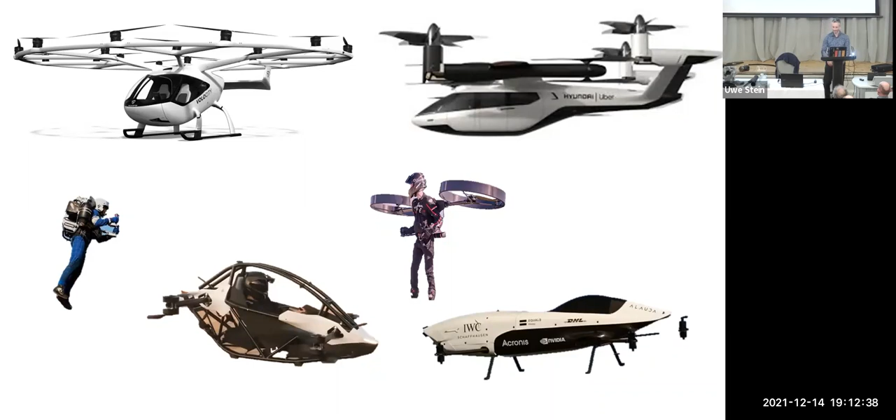I'm going to come back to this later in the talk, but first, let's try to answer the question, are we just a couple of years away from having air mobility from drones? Is this the next revolution after the smartphone? Or is it one of these fuel cell or fusion reactor technologies that's always 10 years out? And in 10 years, we're still looking at the new technology that's just about to come. So we're going to look at this first. Then we're going to move on to the Flowcopter work on the drone. And at the end, I want to talk a little bit about the markets we're trying to address with this.

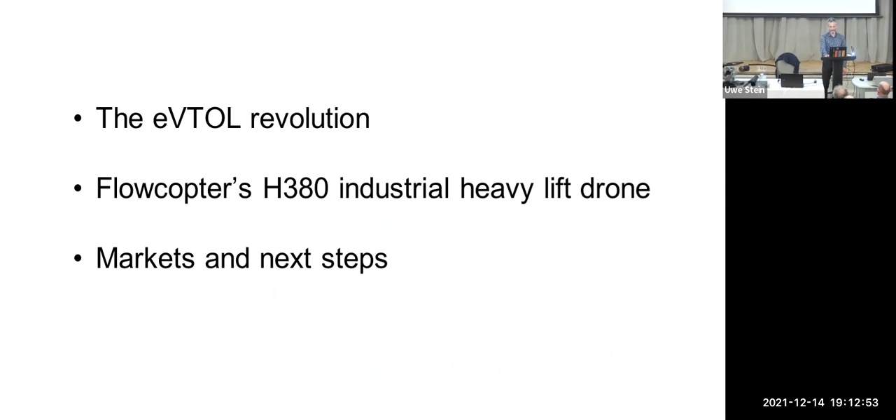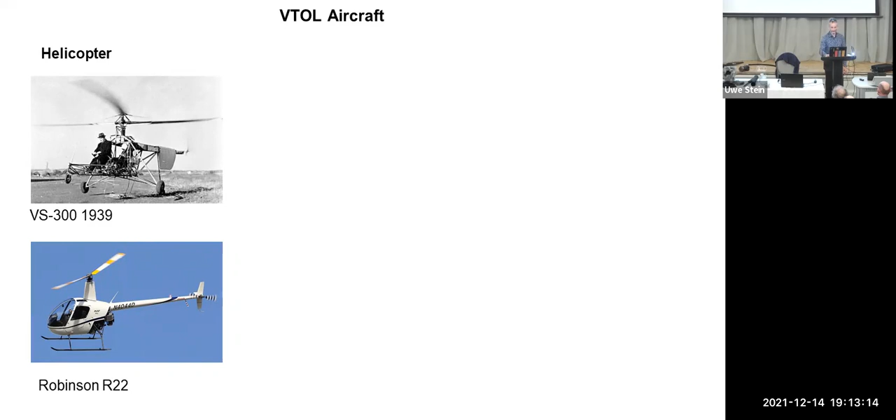Most of you will think when it comes to vertical takeoff and landing aircraft about helicopters, as they've been around for about a century. You can see a very old one and a modern one on the left. What might be slightly more surprising to you is that actually before helicopters, people were building quadcopter drones. As you can see there in 1923, so 10, 15 years ahead of the first commercially viable helicopter. And at the time, it might have seemed easier to have 4 props lifting you up, controlling the pitch on each of the 4 rotors.

But it turned out to be a very, very difficult task for the pilot to stabilize such a device. So you had a joystick controlling the pitch on the 4 different corners, and the vehicle is inherently very unstable. And pilots just could not stabilize the device in air. The helicopter, as you can see on the left, is inherently easier to stabilize because you have a single large rotor above you with a large gyro effect. So that's really what stopped development of these quadcopter or drone type looking devices.

And it's only since the advances in computer technology and gyros, where part of the control of the device will be done by a computer, that they came back into play about 10, 20 years ago, maybe slightly earlier. So first, very simple electronic control systems. And they have now been developed, as you can see in the lower picture there, to quite advanced and easy to fly devices. Effectively, they're flown by a computer.

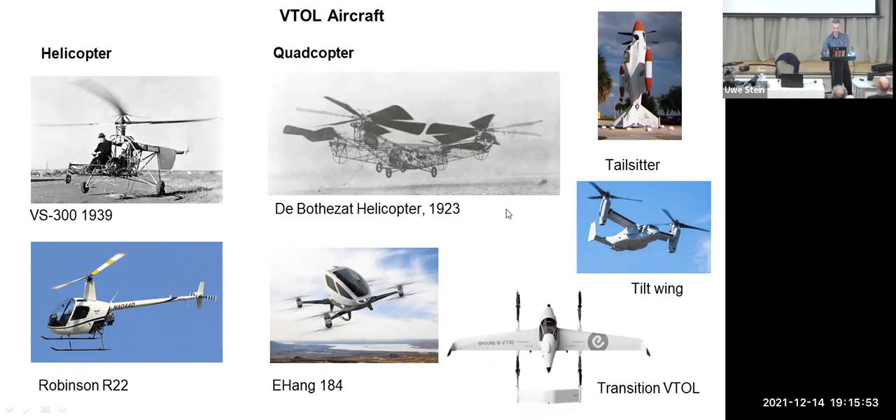Of course, to fly, we need a power source. Otherwise, you couldn't stay in the air. And really, the two competing technologies are gasoline or fuel, or batteries. And traditionally, pretty much everything in the air used gasoline to stay up in the air. But nearly all the new proposed devices for urban transport in cities claim that they can use batteries. And I did a quick comparison here to see what is the challenge.

So if I want to design a drone using batteries, then we have to limit ourselves to the capabilities of these batteries. So when we look on the left, we know that there's about 12 kilowatt hours per kilogram of petrol. So burning 1 kilogram of petrol gives you 12 kilowatt hours. You run it through your engine, maybe 30% efficiency, maybe more or less depending on the type of engine. And you end up with about 3.6 kilowatt of useful shaft power per kilogram of fuel. Let's compare this to the batteries.

There are some experimental batteries with incredibly high power densities, maybe above 400 watt per kilogram. But in reality, when you put them into a battery pack as a product, you're well down on this. So to give you an idea, the latest Tesla battery pack, probably using one of the most advanced mass-produced batteries, is at about 160 watt hours per kilogram.

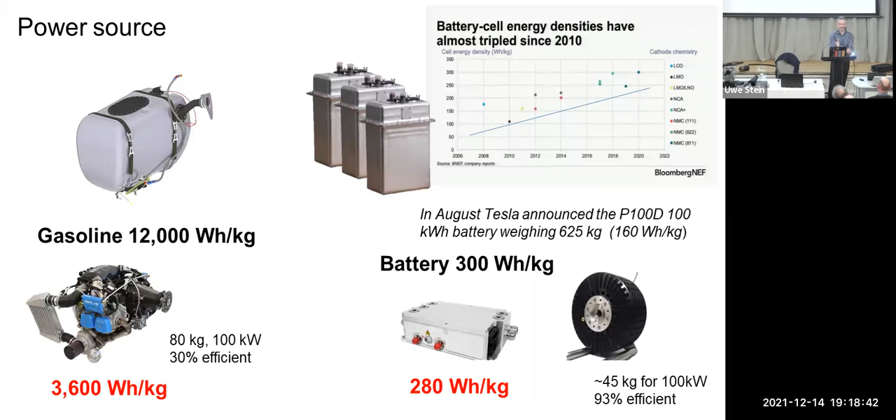So what we can see here is that the battery solution is down by a factor of about 13. So for 1 liter of fuel that I have in my helicopter, my drone needs about 13 kilograms of battery pack. And this might be a problem because, you know, when you want to fly, it can't be too heavy.

Let's look, how much energy does it take actually to fly? So we want to stay in the air. We need an engine to lift us up. How much energy does it take? And there's a very simple correlation between your rotor size and the energy it takes to stay up in the air with a rotorcraft, with a device that flies below a propeller. So basically, the bigger you make the rotor, the less power you need.

And that's just because the axial velocity of the fluid against which you push yourself up follows sort of a square law. Velocity squared is the energy in it. So the faster you accelerate it down, the more energy you need, squared. So on the right graph here, you can get an idea what the industry is doing. You can see that if we are on a large helicopter rotor, we can get as much as 5 kilograms lift out of 1 kilowatt of power.

But if we are on the bottom right there, let's say we have the Harrier jump jet and it's jetting the gas down at about Mach 1 out of its nozzles, then we need about 5 or 10 times the energy to stay airborne. And that brings us to the next problem because, as I said, let's design a drone. Let's see if this actually works.

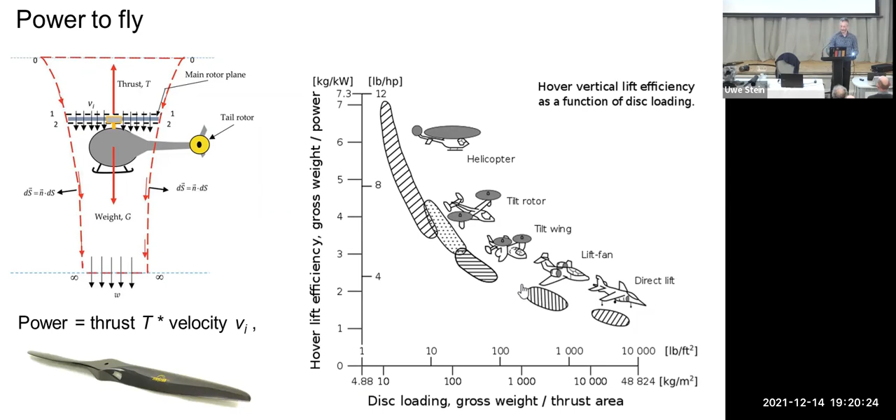You want an urban transport drone, it's meant to park out there in the street. So the size of a car would be a sensible starting point, but that gives you quite a small rotor area. So let's have a look at the extremes.

So on the left, we see the Atlas project. It's a project to build a helicopter that's powered by a human. Very limited power. And obviously they only achieved this after years and years of development by going with a massive rotor. You can see the picture up there. The rotor is spanning the footprint of a 737 passenger jet. And you see in the picture below the person hanging in the lines of this rotorcraft.

And it's quite amazing. They managed to produce 155 kilograms of lift out of 1 kilowatt available power from the human. Right, 6.5 watt per kilogram. Not very practical for our urban transport delivery device.

If we go to the other extreme, a Japanese startup company using a motorbike engine, 170 kilowatts, screaming along. When you watch the video, it's incredibly noisy. And here we have a device that weighs 350 kilograms. It needs most of its engine power to take off, so maybe 150 kilowatts. So you get the idea. If you want an urban transport device, you can make it big, and it needs very little power, but you make it very small, and it needs an awful lot of power.

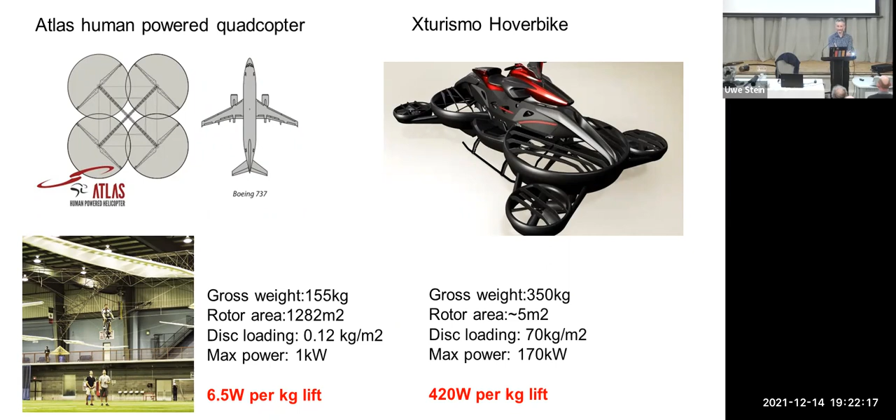Another interesting fact to consider when you design a rotorcraft is, so far I only talked about how much energy it takes to lift it off the ground. Of course, we don't want to just stay in the air, we want to travel along. And there's an interesting effect. Once you start flying forward, you actually need less energy. Because when you sit still, you create your own downdraft. So the whole air column in the area you are in starts moving downwards. You have to push yourself faster and faster up against this downdraft that you're creating.

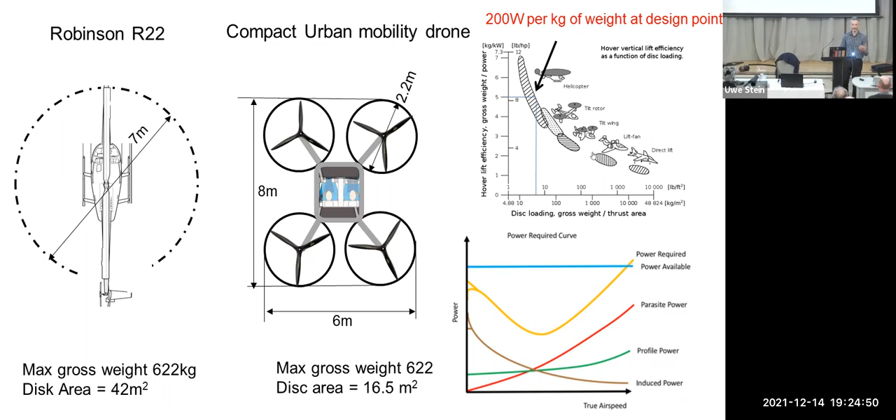So, you want to go home? Maybe it's two of you want to go home. Maybe it's one with a pilot. So the verdict is out if anyone is brave enough to go into a device without a pilot. There's just a fun question on a Christmas night: if you could order your Uber Air or Uber self-driving car or Uber taxi with a driver, what would you pick? There wasn't a clear answer. I guess people would be intrigued by sitting in a device and being flown home. But then being in there without a pilot is also quite a scary experience.

Remember, these things can't auto-rotate. People talk about emergency parachutes, but they just don't work if you're low. They only work when you're high up, because you need some time for the parachute to come out. And also, who would deploy the parachute? Is it the passenger on their own, just pressing a button and saying, I think it sounds bad, I deploy the parachute, or do you have someone sitting far afield, maybe in another country, making this decision for you? So there's quite a lot of problems with autonomous flight, because today we trust the pilot to make decisions when things start going wrong. So, a bit unclear.

But let's imagine we have two people, a passenger and a pilot. So 180 kilograms for two people. Let's imagine we want to cruise along at 100 kilometers per hour, sensible speed. And then we need to look at the range. Helicopters today, 300 kilometers, 400 kilometers would be a typical range for small helicopters. Not a hope with batteries, but what's a number that would make sense, where you could say we could do something with this device? So flying from London City to Heathrow Airport, then having to recharge, sort of a minimum number where you could say there's some use for it as an urban mobility vehicle. I mean, people don't like to buy electric cars with less than 200-mile range, but let's say this thing has only 30-mile range.

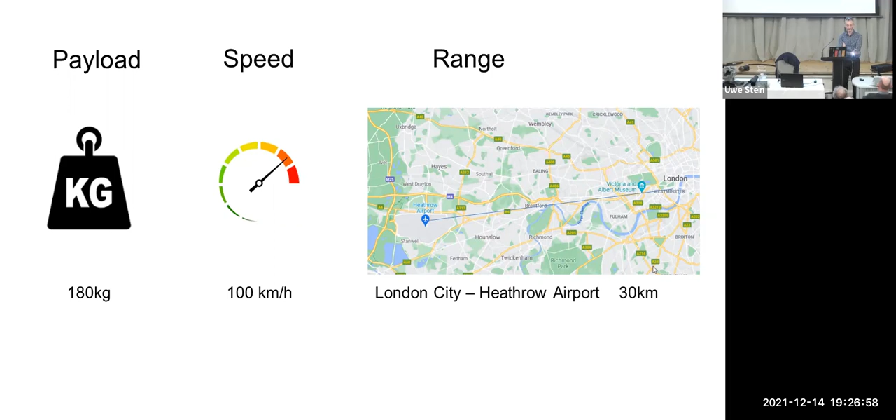Okay, so summarize the numbers. We want to fly 30 kilometers at 100 kilometers per hour. It takes about 20 minutes if you allow a minute for takeoff and landing. You, of course, have to consider when you're up in the air that there's wind. And even a moderate headwind of 20 miles an hour, which is not very much, it's an average day in Edinburgh, means you already need to have the energy for 30 minutes. And then you still got to consider that things could go wrong. Let's say you've flown in the wrong direction, or your landing pad has gone on fire.

So there's a pretty hard rule today that helicopters must have 30 minutes reserve fuel on board in order to be allowed to fly in the UK. So you need to have 30 minutes spare fuel capacity when you land. If you go below it, you have to actually report it as an incident. You landed with less than 30 minutes to spare, it has to be recorded. So let's say the lobbying is strong and we get this down to 15. Still, in my mind, a bit like driving along a busy motorway with an exit every 20 miles and having 20 minutes of fuel in your tank. It's quite scary, but let's say we get this down to 15 minutes before you drop out of the air. That means we've got to design a 45-minute flight time battery into this device.

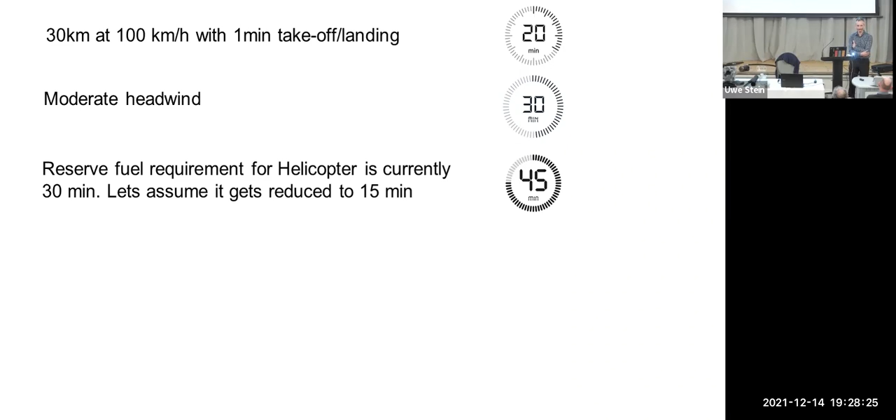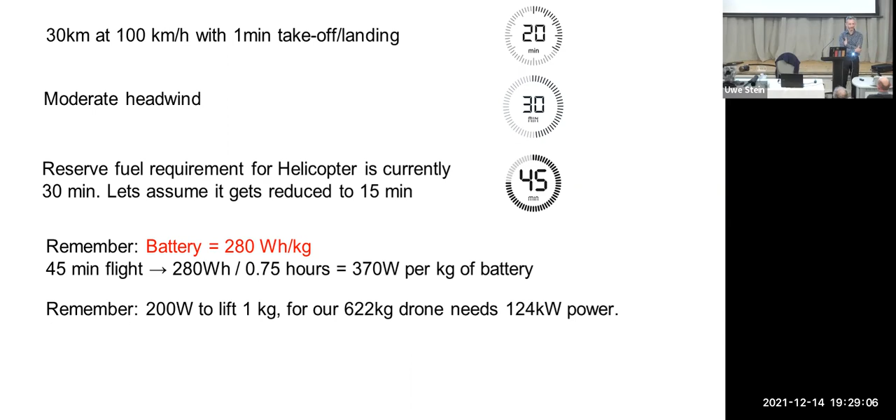So you might remember I said it's about 280 watts per kilogram you get from your battery. That's after the efficiency from the conversion. So for a 45-minute flight, I can get 370 watts from my battery, since I want to discharge it in 45 minutes. So I can draw a bit more for the 45 minutes than the capacity per hour. And I need to produce 200 watts of lift for 1 kilogram. So I need 124 kilowatts of power on my device to stay airborne. And now we can just calculate out the battery weight is about 332 kilograms.

So I started with designing a drone, which I thought would be the small hover bike you can jump on. Went already up to 600 kilograms. It's quite a big beast, but that's a long way from where we need to be. It still doesn't work because it's only leaving me 110 kilograms for everything else. And I don't know how heavy this drone will be, but even the most modern carbon fiber structures and lightweight electric motors are a factor of 2 or 3 out. NASA recently did a study looking at these drones, and ended up with a 2-ton drone having a 700 kilogram battery in it to cover 30 minutes of flight.

So I must disappoint you. I would say the revolution of calling Uber Air to fly you home is still some way from where we are today. But you might make up your own mind.

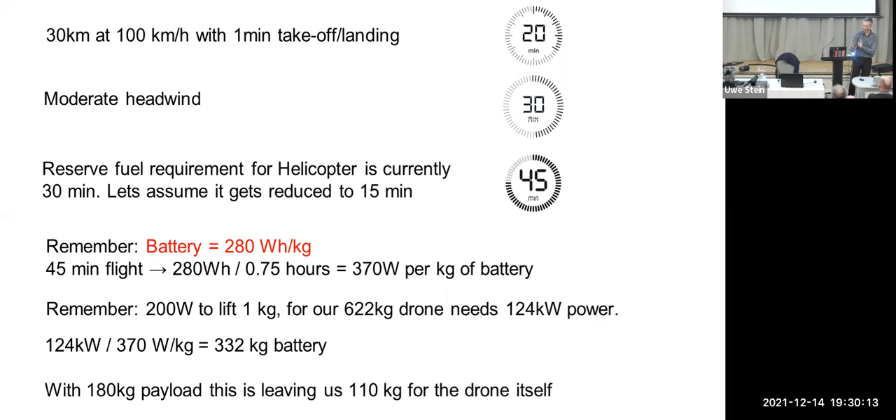And we can see these numbers with one of the leading companies developing it. On the left, you see EHang, Chinese developer. So they got to 30 minutes. That's basically with no reserve. It's probably with 20 degrees and a high pressure region, and the trickle charge batteries and everything at the best. That's how far they got. But as we know as engineers, there's a difference between an academic study and a one-off demonstration and actually having a product in the market. Because batteries do age, they're not all the same, you need to leave some margin.

And Volocopter, a German company, I think they're doing a little bit better because when you look at their device, they decided to put a massive rotor above it. So they got it down to something like only 12 kilograms per square meter loading. So they have a 40 square meter rotor. But it's not clear to me how to transport this device because it's a fixed carbon fiber ring up there, something like 8-meter diameter. So it's not exactly an urban mobility device, I would say. It's probably quite a difficult device to transport.

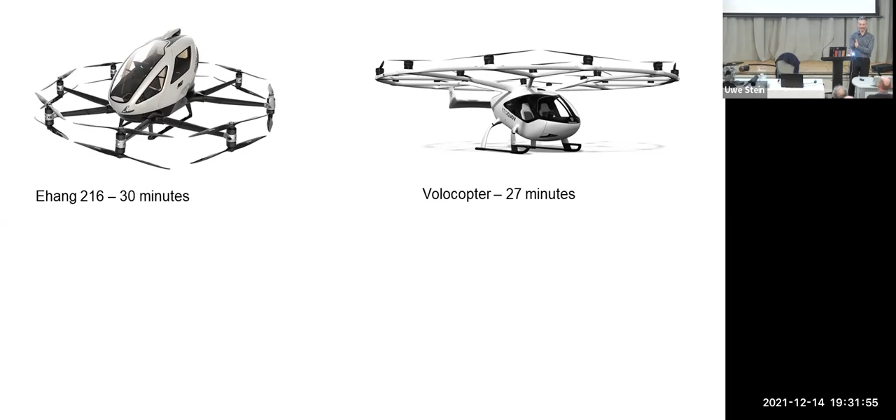But of course, these companies are well aware of their shortcomings. And 2 things happened fairly recently. A, these billions of investment that went into them are starting to be questioned. And all the companies, and I really mean all these companies, are now moving on. Airbus, Volocopter, EHang, there's 2, 3 others I found. They're all going like, okay, this is not going to work. Let's make transitional planes. Because it's just inherently so much more efficient to fly with a large wing and only use the props for takeoff and landing.

So we can see a change in the market from the dream of a little hover bike to now these companies working on what's effectively full-size aeroplanes with props to take off and land. And even then, the battery is only giving them ranges of 100 miles, 150 miles, not really competing with today's expectations on aerospace.

So it's not all doom and gloom. I mean, you might ask yourself why the guy who works in a drone company turns up to tell you how hopeless everything is. Because you might also remember back 10 minutes ago, I told you that fuel is about 15 times more energy dense. So if you use fuel, it actually works quite well. But then there's, of course, a dirty word, using fuel, CO2, very bad for the environment, using a petrol engine.

But you also got to be very realistic about an electric plane or drone, because we all know when you make planes heavier, they need a lot more energy. And flying a battery with you also costs a lot of energy. So when you look at the actual CO2 footprint, you find that these electric drones are pretty terrible. And we can demonstrate this by having a look here.

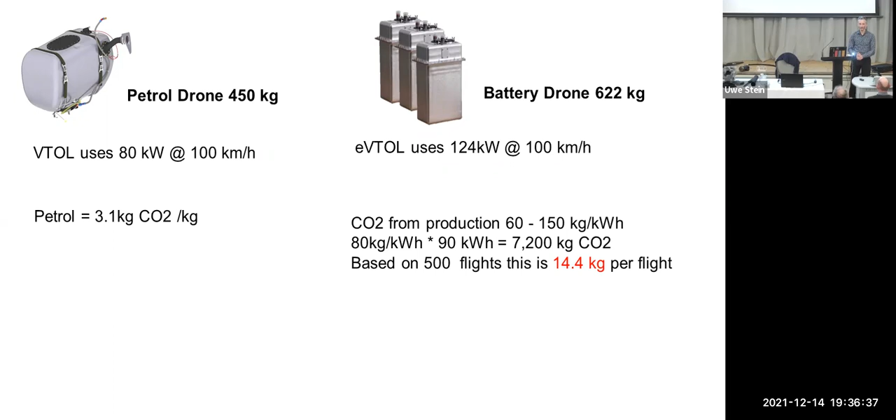And even with 500 fast charge and discharge cycles, you would expect quite a significant decay in your battery performance. So some people say these are fast discharge rates. NASA had a recent study; they can only get about 200 cycles where they can guarantee the performance of the battery. Other manufacturers claim 800, so I used 500 here. So it means for each flight, we have to allocate 14.4 kilograms of CO2 emission from the battery production alone.

So again, we can calculate this out. Flying with my drone, an 80 kilowatt drone, for 20 minutes needs about 7.2 kilograms of fuel and emits 22.3 kilograms of CO2. Do the same calculations on the electric drones. I've got to charge the battery.

The National Grid is about 230 grams of CO2 per kilowatt-hour. Some grids like in Dubai are 5 times this. Some grids in Norway may be lower, but global is more like 300-400. So I'm quite optimistic here with a fairly efficient grid, the UK grid, where you don't have much coal and lots of renewables. Still then, we end up emitting actually more CO2 with an electric drone.

Maybe the solution is to cycle and not fly with an electric drone. Whatever we do, flying is probably quite carbon heavy to get from A to B. In fact, a Bell helicopter only needs 16 liters per 100 kilometers. So that's even better than a drone. So whatever we do here, it's going to be quite difficult to compete against the bog standard Robinson R22 or Bell helicopter. When you take the numbers from them, they're even better. Some of them are as low as 10 liters per 100 kilometers of flight.

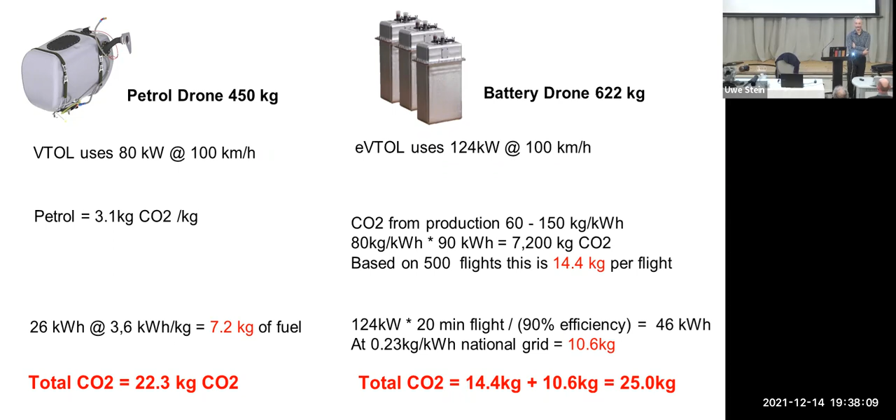So not so easy. But one thing we can do, and there might be some future in this, and I think the aerospace industry is increasingly looking in this direction, is to use excess energy from renewable production to produce hydrogen. Because we have more and more renewable energy coming on, and there are times on a Sunday afternoon when you just have too much. In North Germany, often half the wind farms get switched off because they don't know where to go with this electricity. So one option is to use this to make hydrogen.

And once you have hydrogen, pretty nasty stuff, difficult to transport, you can combine it with CO2 from the atmosphere to make synthetic fuels. That's a technology which is quite expensive at the moment. It's very inefficient. But I think there are more voices in the aerospace industry saying that might be one way forward. This might actually be a more sensible way forward than flying heavy batteries around. So to source your fuel from renewable energy.

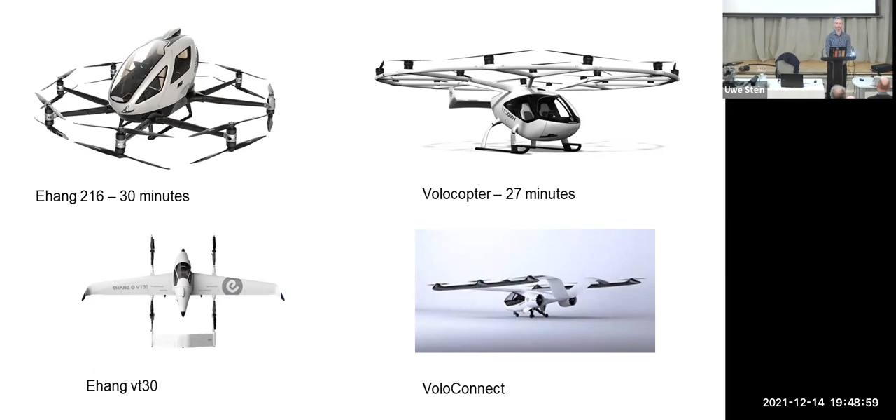We also looked at diesel piston engines for planes, because if you want to fly out to, let's say, a wind farm, they don't like having petrol out there, so they would prefer to use diesel jet fuel. So the next engine, the Continental, is the equivalent engine. It's a bit heavier for the power, but then you need less fuel per hour. So on a longish flight, it works out pretty equivalent.

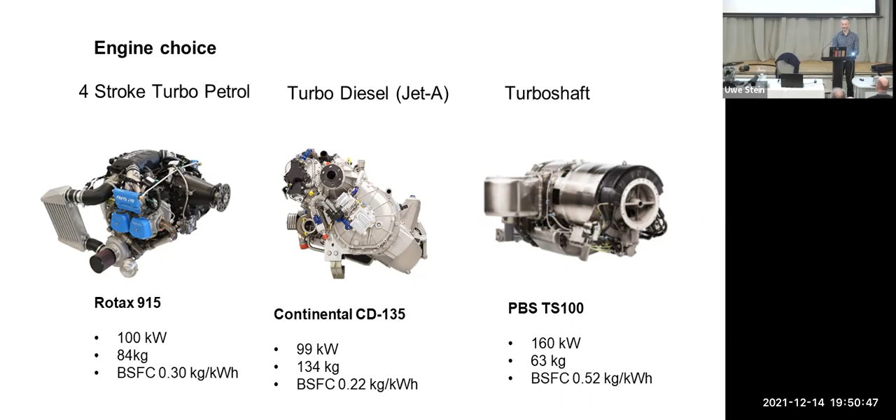Using this engine, as you can see on the left, we combine it with what we call a digital displacement pump. It's a new type of hydraulic pump that's very efficient, very controllable, and can have multiple outputs that are independently controllable. I brought you some samples, this 3D printed one, to get an idea of the size. In cast iron, it's about 45 kilograms. You could probably make a lightweight aerospace version, about 25, 30 kilograms. And this pump can convert the full 100 kilowatts from the engine into fluid power.

And it can independently control 4 outlets. Conversion efficiency is around 94, 95%. Much more power dense than an electric machine, and also a lot cheaper. It doesn't need an inverter controller for it. And in production, you're only looking at a few £1,000 for a machine like this, compared to very expensive electric machinery.

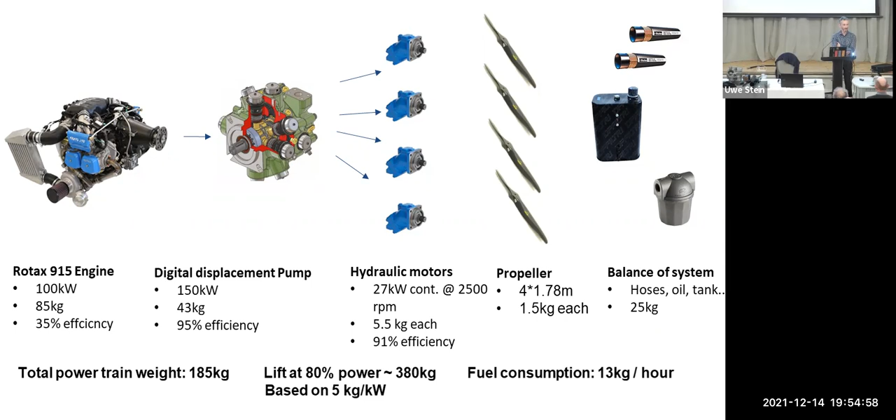Fuel consumption is about 13 kilograms per hour. So again, when you work it out in CO2, it's not terrible for a 400 kilogram device flying. Could probably be a bit better. If you use a diesel engine, it comes down to about 10 kilograms per hour, but that's roughly where we are.

So picking up again from where we were in Artemis, when we developed this technology, we were bought over by Mitsubishi Heavy Industries. We started developing a large wind turbine, got all the way up to a 7 megawatt transmission. And Artemis is a quite inspirational place. And people had lots of ideas making pumps for America's Cup boats and for all sorts of wacky applications. And Niall Caldwell came up with the idea to put it in a drone. He said people were smiling initially a little bit, but then doing some numbers, it turned out that it's actually quite an attractive arrangement. Next question that people had, is it actually controllable? Can you actually control a drone with such a transmission?

And to answer this, we built a small test rig. So what you see is a surfboard mast. On the mast, you see a small hydraulic motor, smaller version of this one, and a small propeller of about this size, half the size or the area of the full-scale one. And we said, let's see if we can fly. Because if we can fly this weight on an arm in a position, then obviously we should be able to fly a drone, which is just having 4 corners.

And you can see in the video that we can control it on the lower set point. We can then do a control demand and put it into the upper set point. But we also need to be resilient against somebody upsetting the system. So we had a special technique to trigger some gusts, which you will see appearing now. Somebody came with a broom and hit it. But you can see the control system is always bringing it back to the target position.

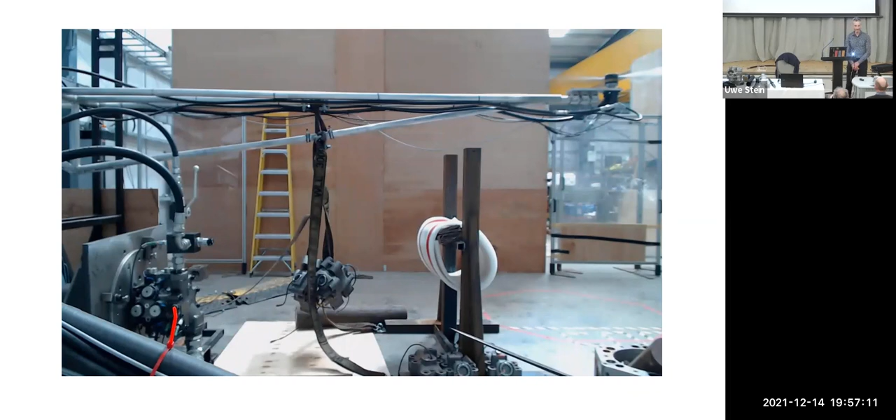So here you see the next arm. It's now a bit more beefy. It's a large aluminum substructure. And on the luggage belts there, you see some cast things. We loaded it up with about 85 kilograms of lift weight on the outer end.

And now we're going to the full scale. So the motor I showed you a moment ago is a larger propeller. And we said, can we lift 85 kilograms and stabilize it? And again, it pretty much worked out of the box. We got it to fly. So it's sort of nicely stabilizing it with the heavy load.

Again, one comment on urban air mobility. We had this one running in what we call building 3, which is a long way from the office at the front, I don't know, 100 meters. And the people in the office were complaining about the noise.

These props are noisy. Once you have a tip speed of 150, 200 meters per second, the aerodynamic noise is like this booming noise. It travels. It's a bit like sitting in the airport when one of these flyby prop planes takes off. You hear this booming. So it doesn't matter if you're electric or an engine. Most of the noise really comes from these propellers.

Having a sort of confidence that we can make it work, we can control it, we can scale it, the rate is good, we decided to go forward with this project. But Danfoss had bought us at this point, and being a hydraulic company, delivering pumps and motors to large OEMs such as Volvo and Liebherr, it didn't really fit their portfolio. But getting together with a couple of colleagues, we said it's just too good an opportunity to pass.

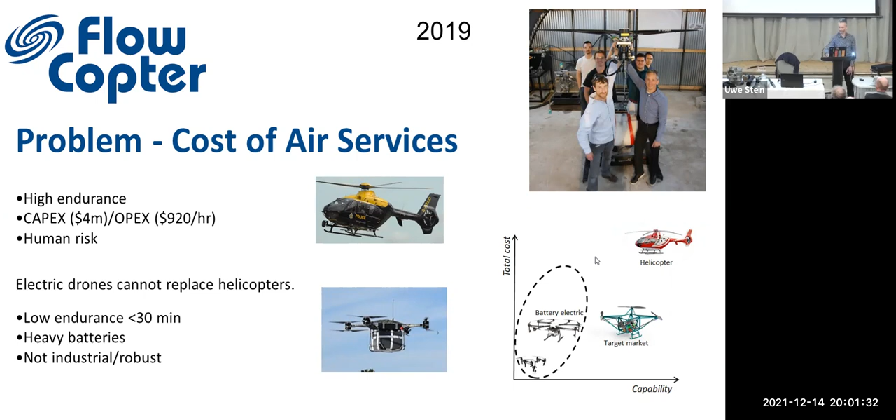We then looked at what business model we choose for the company. And of course, we can just write a patent and try to license it, or we can just try to make drones. And we decided to keep, initially at least, the assembly of the drone, the testing, control system development, and the core IP in-house. So we can mature it in the company, we can make the inventions in this field, we can patent them, we can grow the company at the technology readiness level up to maybe 5, 6, make demonstrators.

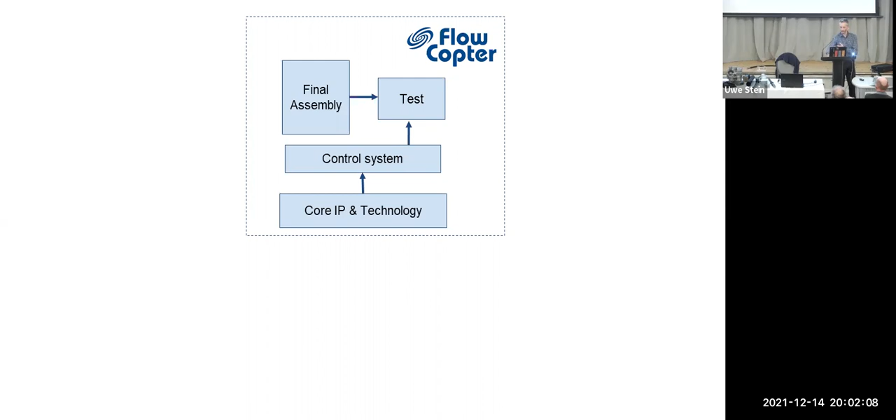And to do this, we have to rely on strong partners, suppliers. We're working very closely with Rotax on the engine. We're working with Danfoss on the hydraulics. We are in touch with a number of flight control system developers, all the way from hobby-grade Pixhawks to very expensive commercial aerospace rated flight controllers. And so we are working a lot with suppliers, and we like to focus on what we're good at, which is a transmission. So we like to focus our team on developing the transmission, and then hopefully use partners and suppliers to do the subsystems.

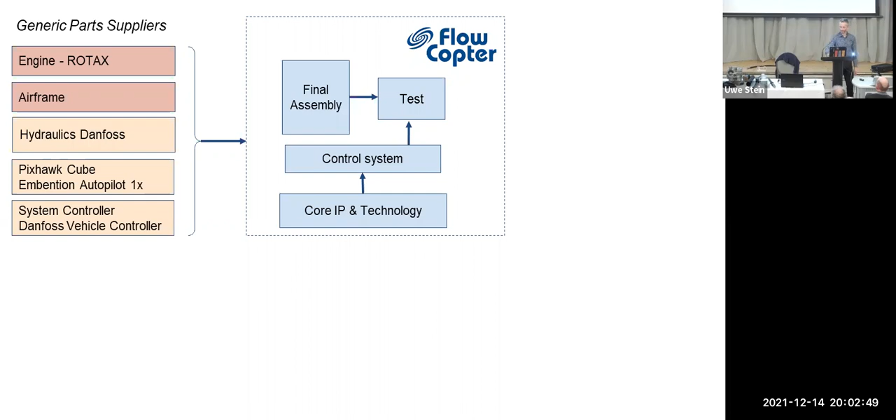Initially, we're looking at markets that are relatively easy to get into. I'll say some more words about this later. But in the long run, of course, there's different exit strategies from the company. We could either be bought over by a large company such as Airbus or license them. Who knows, if it works, they might take interest in us. We could work with a smaller player who wants to make machines for Coast Guard service. So we are quite open on this, but for the next couple of years, we want to mature the technology inside the company.

And for this, of course, we need money. So we're looking at the moment at a combination of government funding, some small amount of money from the Scottish government. We raised some money between us and friends and family. We raised some money from a VC in America. And also we are now engaging with one customer who is planning to give us some money to make a demonstrator. So we're trying to have multiple income streams, both soft and hard money in this one.

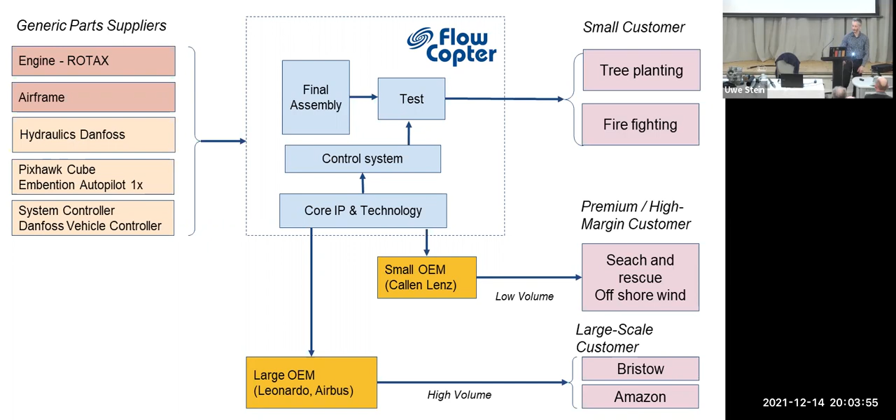Next step, once we had the transmission demonstrated on a single arm, is to make a device. So we decided not to invest a lot of time into carbon fiber structures, keep it simple. We just welded up the device. So we just bought aluminum tube, welded it up, not with a view to fly it, with a view to assemble a complete system and operate it on load cells.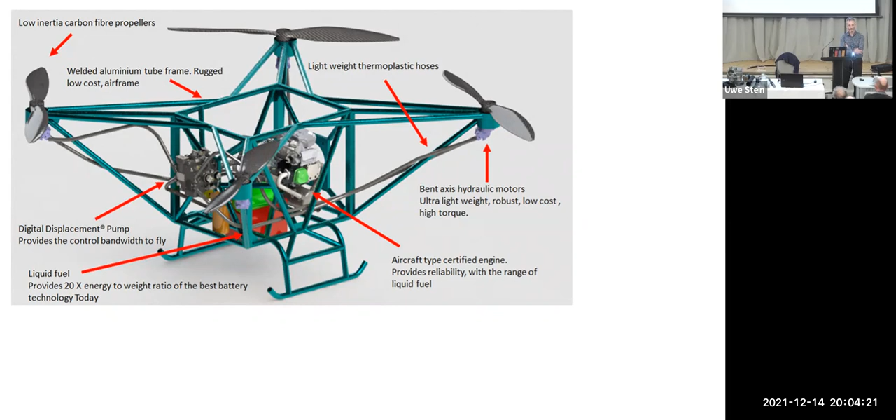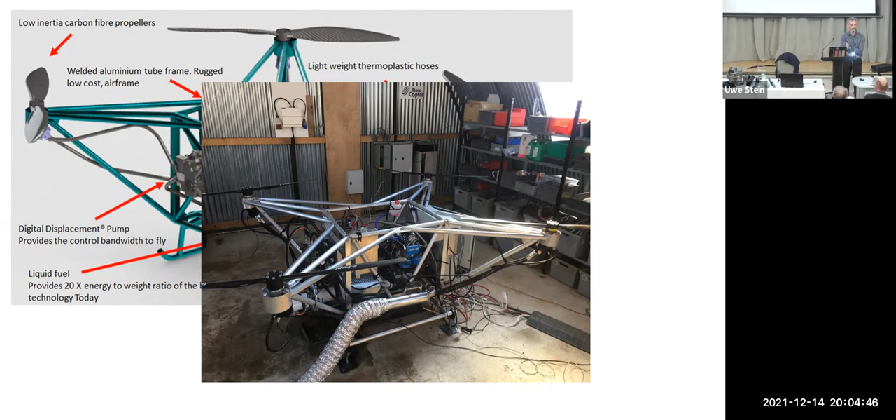So here you can see the complete assembly. Again, it's not a beautiful demonstrator for the public. It's out in the shed near the airport, no heating, freezing cold in winter, running the engine. But you can see the device just about sits on 4 load cells, so we could operate it and measure lift, measure response speeds, measure efficiencies. We then took it out into the field to make a bit better of a picture to raise more money. But it's pretty much still in the early stage engineering work.

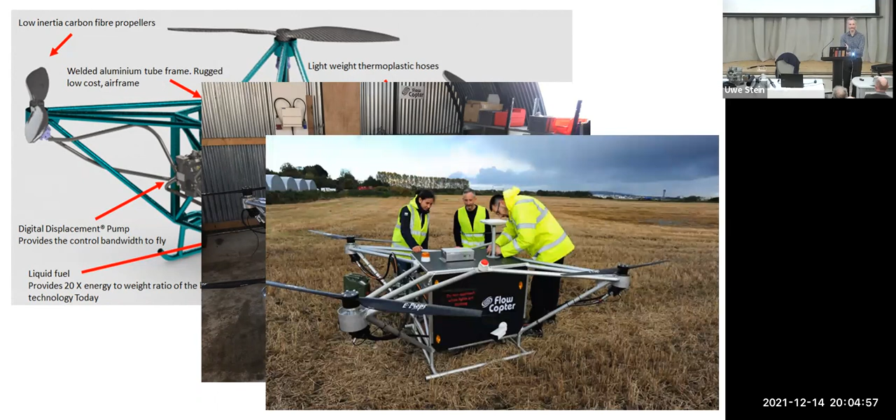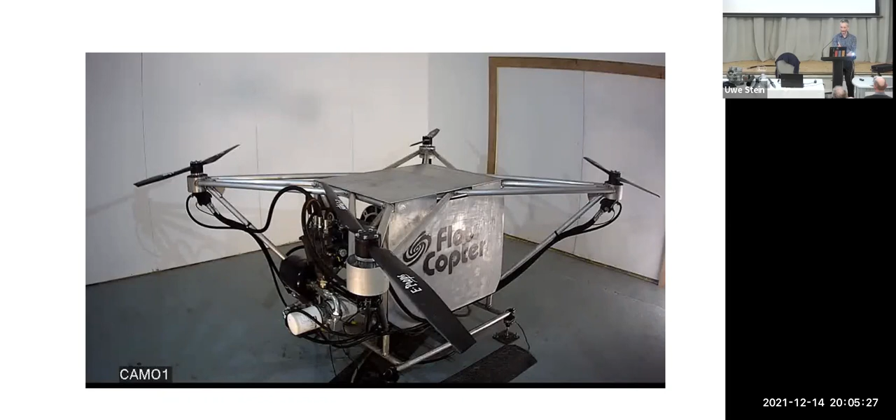At the moment, we're operating this machine with an electric motor in our test cell. We moved in the meantime to Loanhead with a better facility there. And we're operating it in a test cell powered by an electric motor. And we are now collecting a lot of data. How long does it take to go from lift point 1 to lift point 2? How much heat is ending up in the oil to size the oil coolers and so on, vibrations. So that's where we are at the moment. So we're operating this device on test.

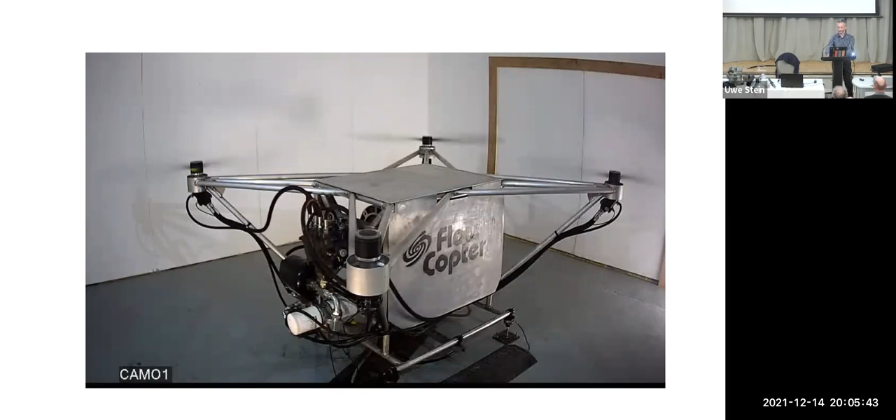So what's next for next year? We need to start flying. We're growing the team and some engineers. And really the mission for next year, target is Easter, to have a device that we can go out with and fly. It's quite difficult to get permission to fly in the UK outside, but you don't need any permissions to fly inside. So we're thinking initially to go into an old farm shed or old building or put it on a tether. And we're planning to make a device that we can operate to demonstrate the capability.

We've done quite a lot of research and thinking on how we actually design the frame to suit the application. The first one we made was this welded aluminium, which is easy, but actually not very strong, because once you weld the aluminium, you lose the temper in the aluminium, strength goes down. And it's very difficult to inspect. We had a crack in the first test run we made. So that's why not many aircraft are welded together, because you want to use a 7000 series high-strength aluminium. That doesn't lend itself to welding. You have to use a softer grade, and after welding, it's even softer. So welded aluminium is actually not very strong. We then moved on to looking at a riveted frame.

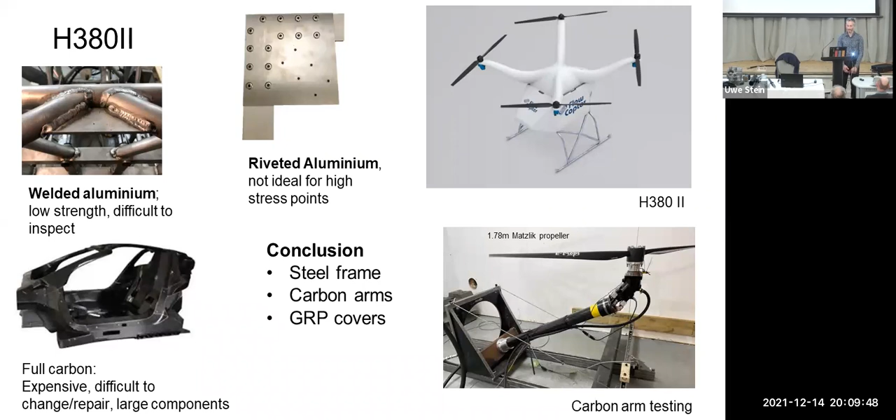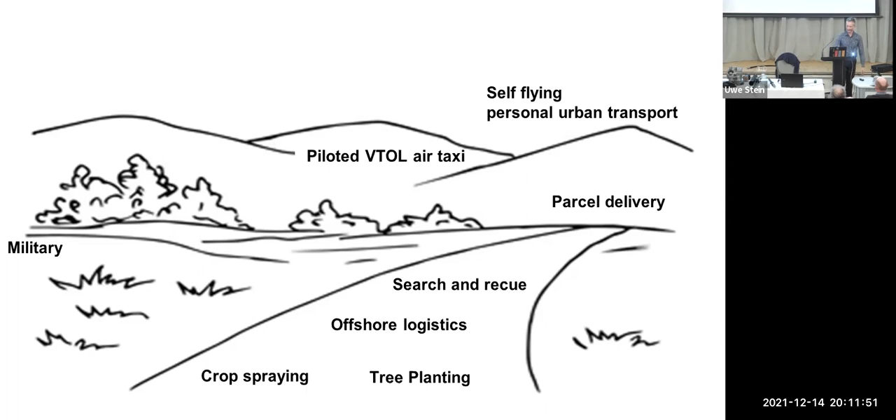So, which one did we pick? Tree planting. You might know tree planting, but what's tree planting? Why would you use a drone? But it's quite interesting, and it's always when you get into an application, you learn more and more about an application. So first of all, I believe tree planting is quite a good thing that we should be doing. And of course, we could say we should have more trees to make the planet a better place.

But I wouldn't even go so far. I would say we should stop losing so many trees. Because at the moment, we are losing a lot of trees every year. And there's different reasons why we lose them. One reason, of course, is people cut them down for timber, might burn them down for agricultural land, want to build buildings and bridges.

And it's quite difficult to fight with them because obviously they have their reasons why they want to cut it down, because they want to do something else there. And it's probably quite difficult to stop this happening.

But then there's a lot of forest loss from forest fires. And it's significant. Last year, about half the size of the UK equivalent burned down between Canada, North America, and the US. So there's vast areas of forest that we lose every year with forest fires. And it seems to be increasing with climate change, hotter temperatures, less water. So we seem to be losing more and more.

And there's a number of companies that are now picking up on this. And what they're looking at is to automate the tree planting, because it's fine to go out with a bunch of students and pay them some minimum wage and get them to plant trees. Problem is they don't come back next year, because after you've planted trees in burnt down forest for months, you know that's not what you want to do for the rest of your life.